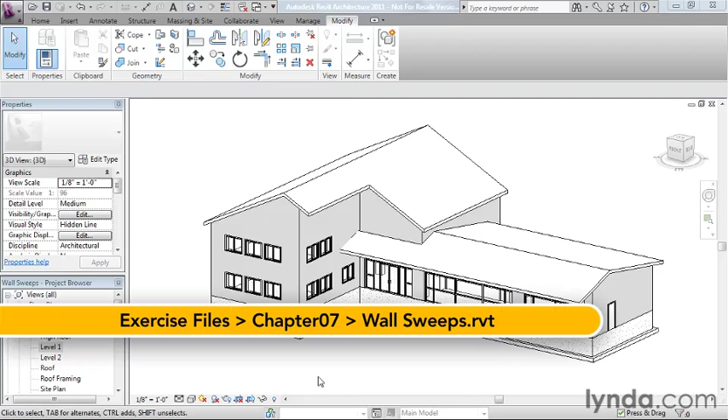The file I have open is called Wall Sweeps in the Chapter 7 exercise files. Let's start with adding a wall sweep to the exterior wall type. We're going to add one that will represent a brick soldier course going around the building. So I'm going to select one of my walls. Because this is a type level modification, I don't need to select multiple walls. Simply applying it to one at the type level will apply it automatically to all the walls.

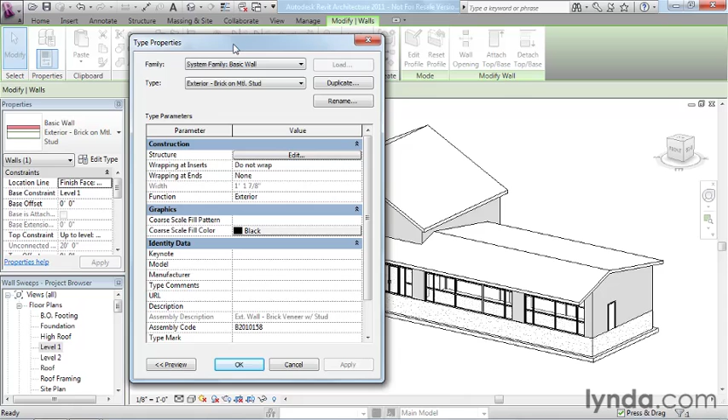Over here on the Properties palette, I'll choose Edit Type. When the Type Properties dialog appears, I'm going to make a little bit of room, and down here at the bottom, I'm going to click the Preview button. I'm going to click the Edit button next to Structure. This gives me access to the structure of the wall type. Down here at the bottom, you can see Modify Vertical Structure, and it says Section Preview Only, and all the buttons are grayed out.

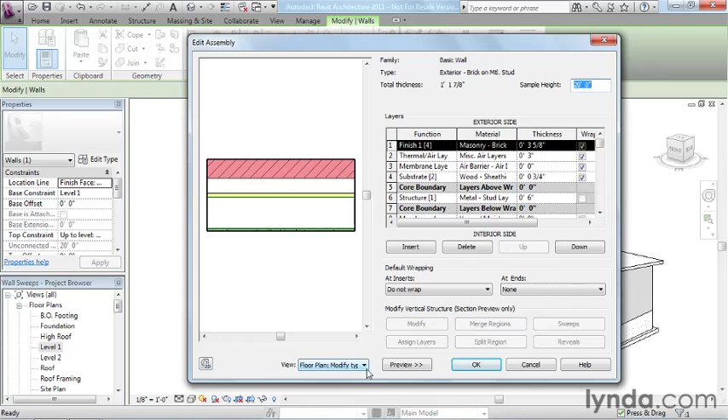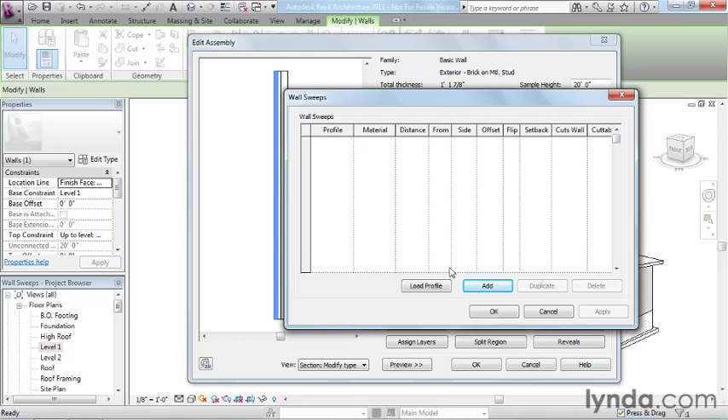What they mean by that is, right here on this little drop down for the view, you need to change to Section. That will give you a section cut preview of the wall that you're working on, and then all these buttons will become available. Now there are several options here. In this movie, we're just going to look at sweeps. We click on Sweeps, and the dialog is currently empty. You can add one or more sweeps to the wall. In this case, I'll add a simple soldier course to this brick wall.

So I'm going to click Add, and an item will appear, and all the default settings occur, which are basically a square, and it doesn't have any material assigned, and it's set at 0 and so forth. So we have a lot of work to do here to make this a little bit more interesting. The first thing we're going to do is choose a profile.

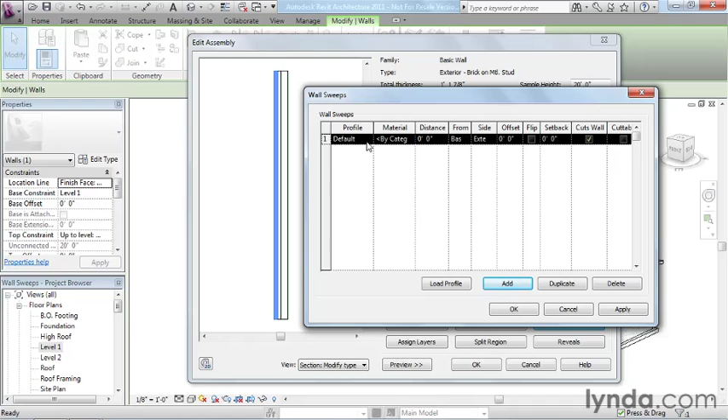A profile is a really simple two-dimensional family that's drawn in the shape of a closed loop. You can open up and create your own profile families. You would open up a profile family template, and you would just literally draw any shape you like as long as it's a closed two-dimensional shape, much like what we've done in sketch mode. That could be used as a wall sweep. In our case, this template that we started the project with includes several existing profile families already loaded in. So we're just going to choose from one of the existing ones.

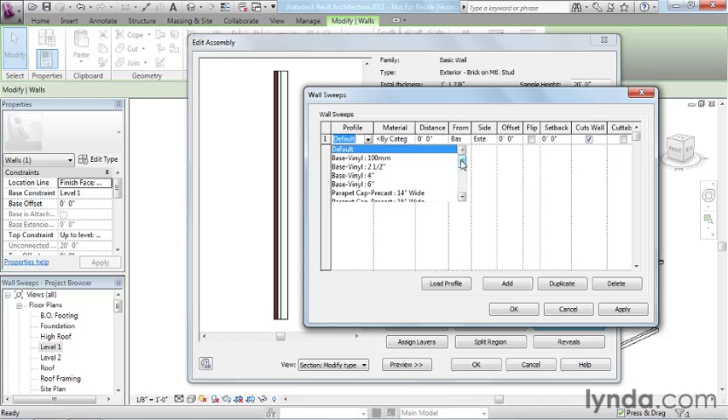You can see that there's some vinyl base. There are parapet caps, which we saw in the Stacked Walls movie. There's precast sills, stair nosings. Obviously, we wouldn't want to put that on a wall. And we have 3 options for brick soldier courses. So I'm going to choose this one here at the bottom, the brick soldier course with 3 bricks, and we'll go ahead and select that.

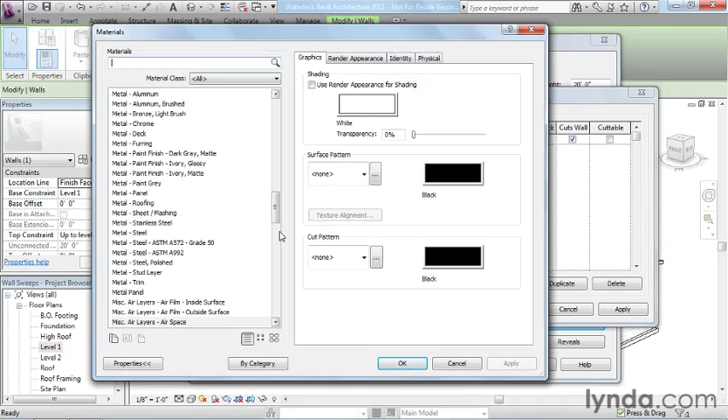Okay. Next, I'm going to click over here in the material column, and it's currently set to by category, which means it'll just match whatever the category for walls tells it to do. I want it to actually look like soldier bricks, so I'm going to click the small browse button right here in the materials. That opens up my materials list, and if we scroll through and look for our masonry materials, there's a brick soldier course material here which uses a vertical line pattern that represents the soldier course bricks. We'll go ahead and click OK on that.

I'm going to skip over distance for a minute. The next thing that I want to do is the from setting, which has 2 choices, from base or from top. I'm going to leave it set to base. In other words, if you look at the section preview, we're going to measure the location of the soldier course from the base of the wall. If we chose top, we would be measuring it from the top of the wall. You can do either one. It's entirely up to you.

The side, I'm going to also leave alone because it's set to exterior. That'll put it on the outside of the wall, which makes sense here. We'll talk about offset, flip, and other things in a minute. Before we know what we have to change here, let's go ahead and click Apply. Now, when I do, down here in the preview, you'll see it selected there in blue, and it's way down at the bottom of the wall. So obviously, we still have a little bit of work to do.

So I'm going to change the distance now, and this will determine how high off the floor this soldier course is going to occur. So I'm going to try like 6 feet and click Apply.

So that moves it up the length of the wall. And again, that's because we're measuring it from base. Next, I'm going to put in an offset here. And I don't want it to hang off the wall so much. I want to kind of shift it in and merge it into the wall a little bit.

Most bricks are 2 2/3 inches. So I should be able to put in, let's try 2.5 inches here. And let's apply that. Now, whoops, that's going the wrong way. So all I have to do is click negative right here, and that'll shift it the other way.

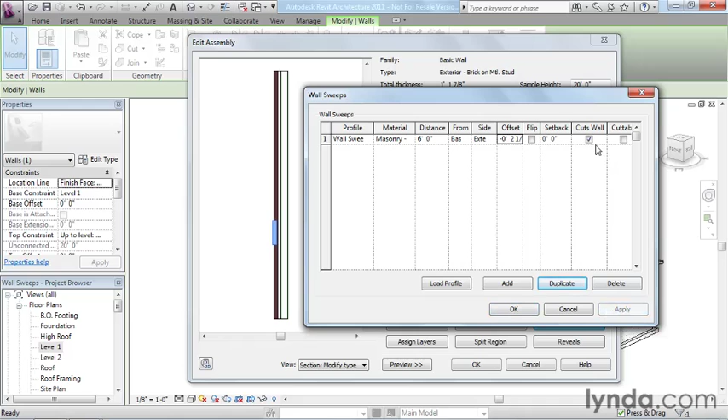Now, this checkbox here says cuts wall, and that's why it's actually cutting into the wall, which I think is a pretty good thing. We can also make it cuttable. And what that means is if this soldier course happens to interrupt a window or a door, the window or a door will actually cut through it, which is also a good thing. We don't want the soldier bricks to just run right through the window.

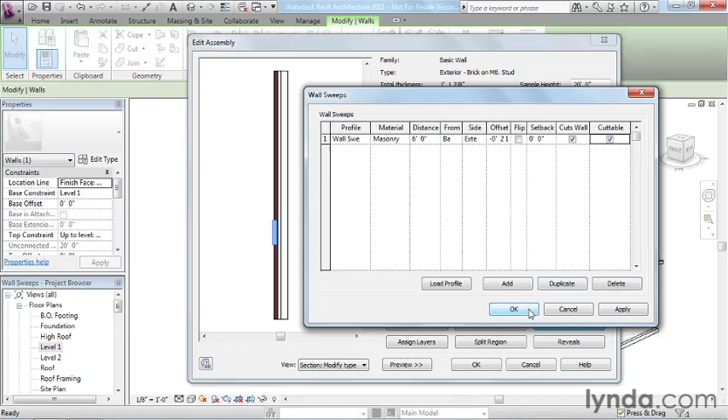And that should pretty much do the trick. Let's go ahead and click OK. So you can see where the preview is absolutely critical to making this work. I'm going to click OK again, and one more time. And you should see that for the most part, that's exactly what we want.

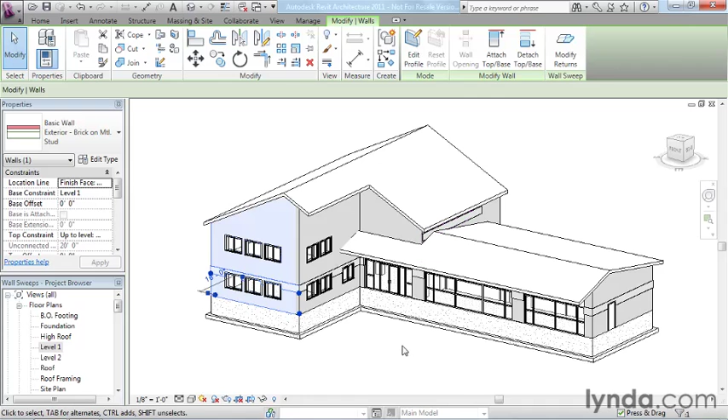Obviously, I don't want it up here, so I'd probably have to choose a different wall type up here. The reason we're seeing it up there is that that's a new wall starting at the second floor. So now the soldier is measured 6 feet from the second floor. So I'll leave that to you to remedy. You just swap in a different wall type up there.

But you can see right here that the soldier course wraps all the way around the building. And that's the result of doing it as a type level setting. You can also see that because we made it cuttable, the windows and doors are cutting through it.

Now, the other way that you can do a sweep is on the Home tab, on the drop-down button for a wall, you can actually just choose Wall Sweep. This is not a type level modification. This is an instance level modification. In other words, you're going to be making this modification wall by wall.

And so I'm just going to go with the default trim board here. And if I wanted to add this trim board, you can see that I can just sort of click on the walls where I want the trim to occur. Now, up here, I can say restart, and then I can add another trim board at a different height. So once you set the first one, you can add multiple segments and keep going. If you want to restart at a different height, you have to reset it.

With the manual sweep, you can also make it go vertically. You can't do that at the type level. But if you wanted this trim board to run vertically, you could do that as well.

Now, I should mention that we also have reveals, and that is an option. A reveal will actually carve away the geometry where a sweep added to the geometry, unless the reveal is actually substantial, like the preview tooltip is showing us here. That's a pretty substantial reveal. I'd be okay with that. But if you're using reveals for something like a control joint in brick, I would not recommend that approach.

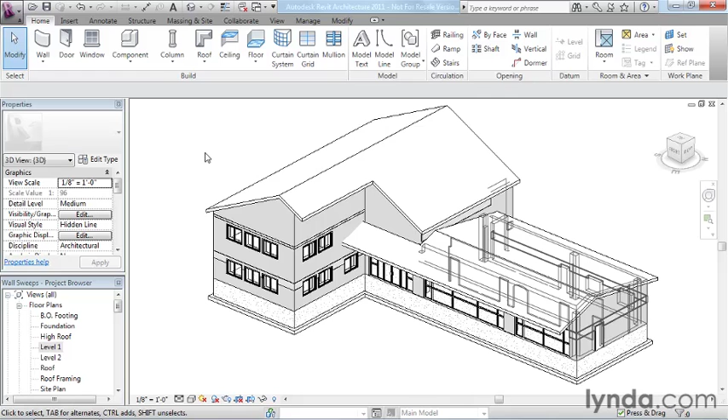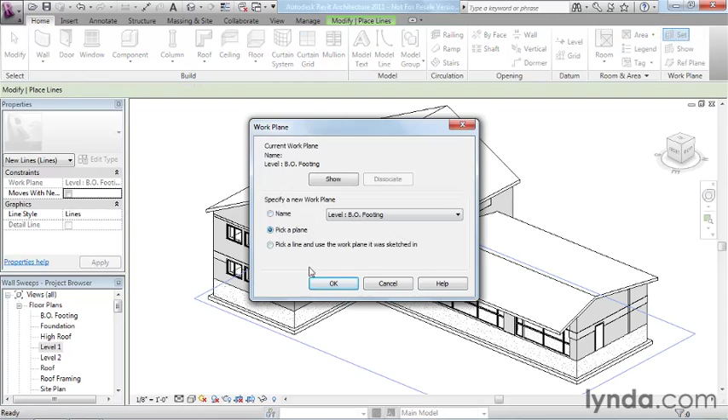What I would recommend instead is to simply use a model line. And a model line is literally a 2D line you can draw on any surface. Now, to determine the surface you want to draw it on, we saw this in the Roof by Extrusion movie. We can go to this button right here, Set Work Plane, click the Pick a Plane option, click OK, and we can pick right on the surface of a wall.

When I go to Model Line, I could then come in and draw a line, and I'm going to kind of go right through the windows right now. I'm being a little sloppy. But the point is that when you look at this in elevation, let's look at the south elevation, that's going to be convincing enough to represent a control joint. You can dimension those. It's going to show in each view.

It does the job. To actually carve away a little half-inch reveal to try and represent that, first of all, it's going to print way too bold because you're going to have two thin lines right next to each other, which are going to look like a thick line. So that's not going to look so well. It's going to be tough to control. And it's just going to make your model heavier and make it perform less optimally than it would otherwise.

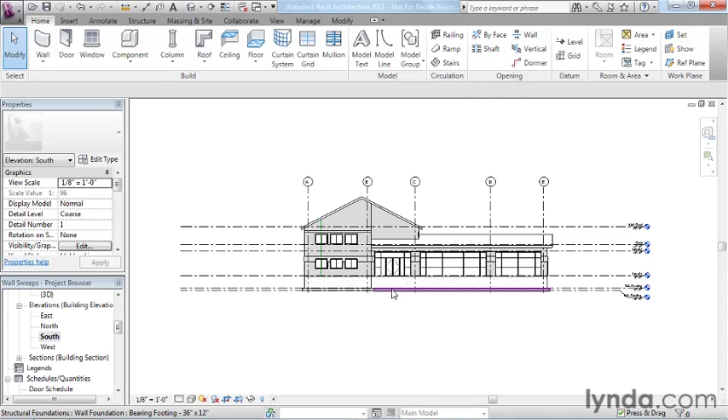So my recommendation for really simple reveals like control joints and stuff like that, use a model line. If the reveal is actually substantial and really is modifying the shape of the wall, then you can go ahead and use a reveal. And the process would be exactly the same as what I just showed you for sweeps.